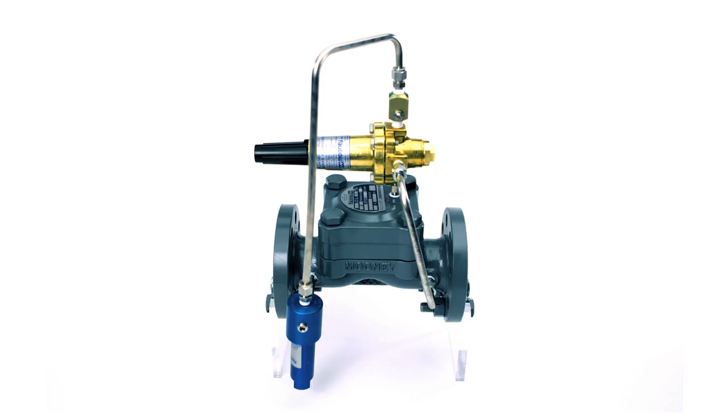Welcome to the Flowgrid Regulator product training video. In this video, you will gain an understanding of the Flowgrid Regulator and its recommended operation.

The Flowgrid Regulator is a valve used to control the pressure or flow of almost any gas or liquid. It is a self-contained pilot-operated device that can be used in pressure reducing, back pressure, and other applications.

The Flowgrid Regulator assembly consists of two main components, the valve body and the pilot assembly. The valve body controls the flow of gas from the upstream system to the downstream system. The pilot assembly is the controller or brain of the device. It measures the pressure in the downstream system. It also provides the proper loading pressure to proportionally control the flow of gas through the valve body.

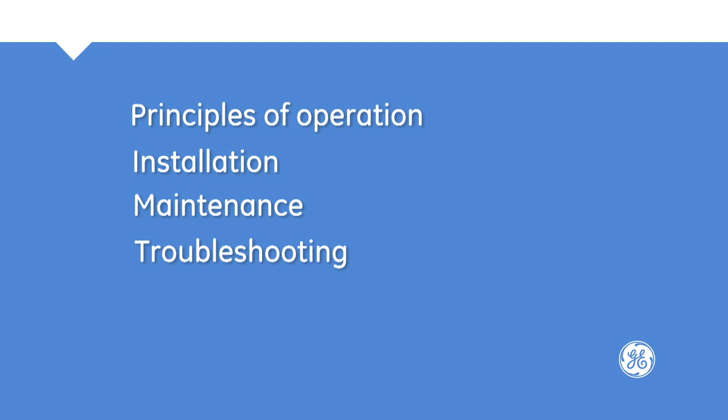In this video, we will focus on the basic principles of operation, installation, maintenance, and troubleshooting for the Flowgrid Regulator. Here are the Flowgrid principles of operation.

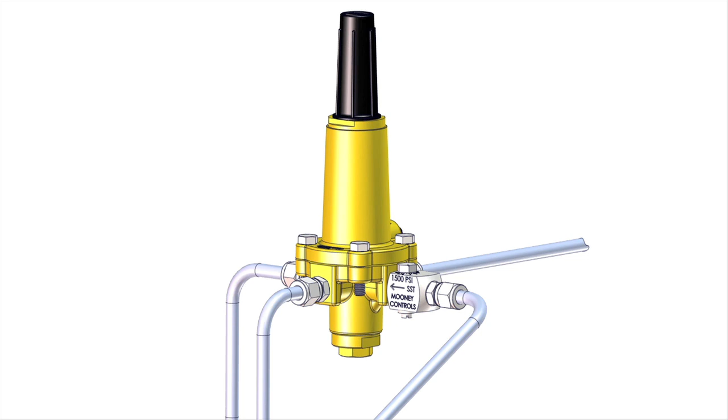The Flowgrid consists of a loading chamber, a diaphragm or throttling element, and the pilot assembly. The pilot assembly consists of the fixed orifice and a variable orifice. The pilot regulator is basically a self-operated regulator. The combination of the fixed and variable orifice comprises a pneumatic amplifier.

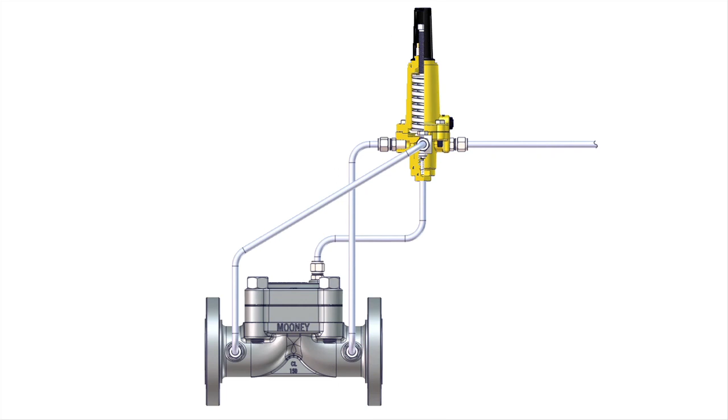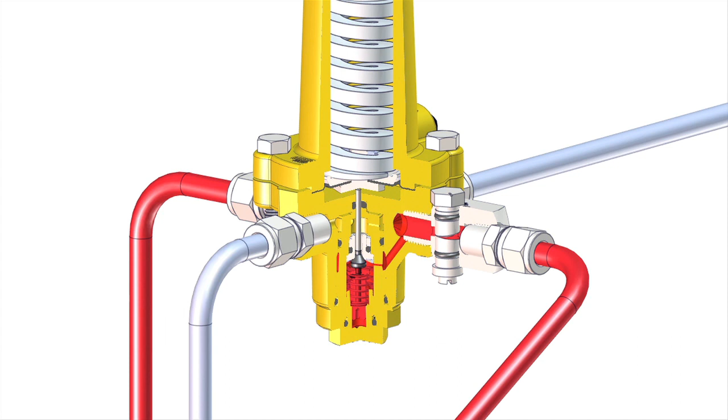The pilot controls the Flowgrid through three stages of control when configured for pressure reducing mode. 1. Fully closed. 2. Partially open. And 3. Fully open. The fully closed position occurs when there is no demand for gas in the downstream system. The pilot supplies full inlet pressure into the loading chamber of the regulator. When this happens, there is a zero differential on the inlet side, and therefore a zero force trying to lift the diaphragm up on the inlet side. There is, however, a full differential pushing the diaphragm down, closing the diaphragm on the downstream side.

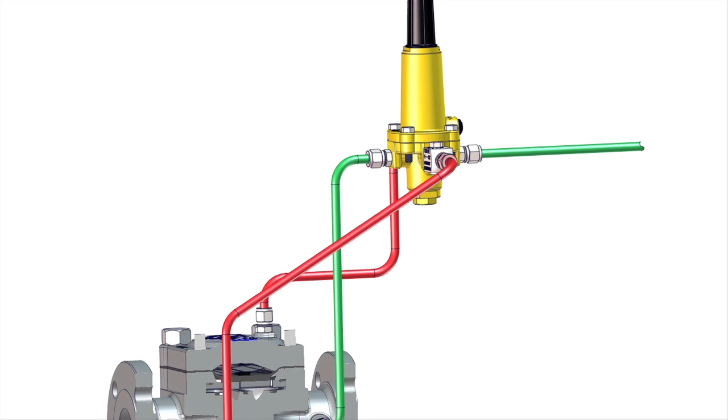The partially open position occurs when there is an increase in demand for gas in the downstream system. This increase in demand causes a decrease in pressure in the downstream system, which is sensed by the pilot. The spring in the pilot then partially opens the variable orifice. As the variable orifice opens, pressure from the loading chamber of the regulator escapes to the downstream system. The decrease in loading pressure allows some of the higher upstream pressure to flow through the regulator. This satisfies the demand and maintains the pressure of the downstream system.

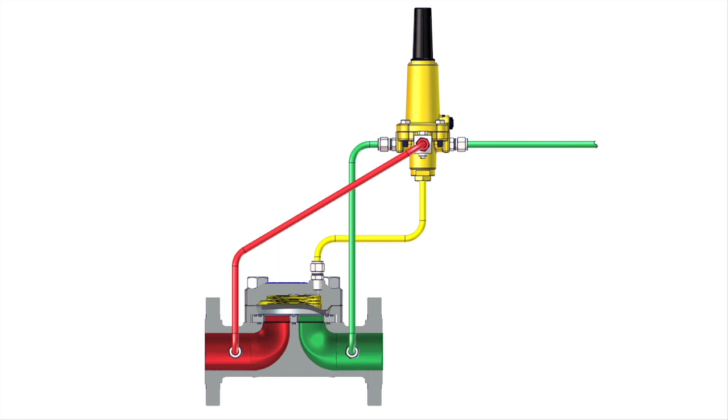The fully open position occurs when there is a large increase in demand for gas in the downstream system. In this situation, the pilot and regulator act much in the same manner as in the partially open position. The difference, however, is that the variable orifice will fully open, reducing the loading pressure to practically the same level as the downstream pressure. This allows for full differential between the inlet and loading chamber, allowing for maximum flow through the regulator.

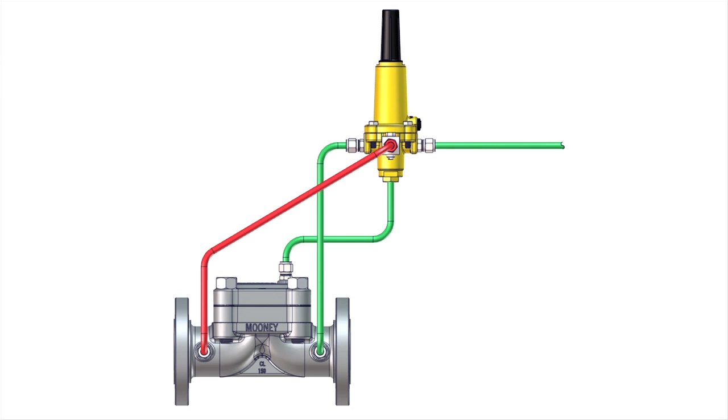The next most common use for the Flowgrid regulator is in the back pressure or relief mode. To convert the Flowgrid from pressure reducing to back pressure mode, simply change the pilot sense line from downstream to upstream and change the pilot's valve orientation. Details about configuring the pilot for use in back pressure mode will be provided in the Series 20 pilot training video.

In the back pressure mode, the Flowgrid remains completely closed until the set point of the pilot is reached. When this occurs, the pilot's variable orifice begins to open and releases some loading pressure to the downstream pipe. This decrease in loading pressure allows the diaphragm to partially open, therefore relieving some of the upstream pressure to the downstream pipe. Additional increase in inlet pressure may eventually cause the Flowgrid to go into a fully open position.

When the upstream pressure increases enough to fully open the pilot's variable orifice, the maximum amount of pressure will be discharged from the loading chamber. This causes the regulator's diaphragm to be fully opened and allows the maximum amount of gas to pass from the inlet to the outlet of the Flowgrid regulator. A decrease in inlet pressure will allow the Flowgrid to return to its partially open or fully closed position.

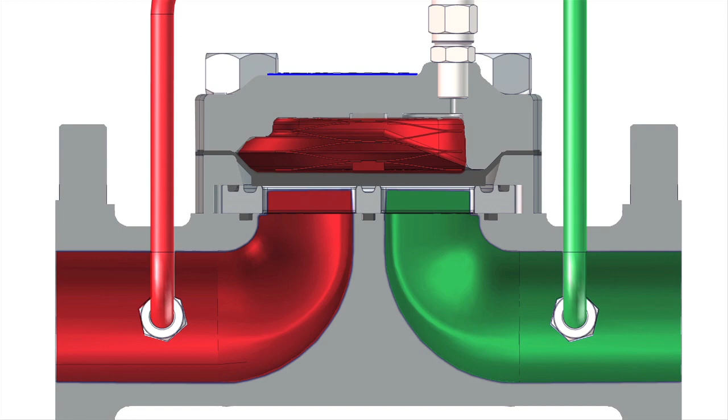Now that we've covered how the Flowgrid regulator works, we'll show you how to properly install it. First, make sure you received all the proper parts with the Flowgrid. You should find enclosed with the regulator a serial card with the serial number, a parts list for the regulator and pilot if equipped, and an installation, operation, and maintenance manual.

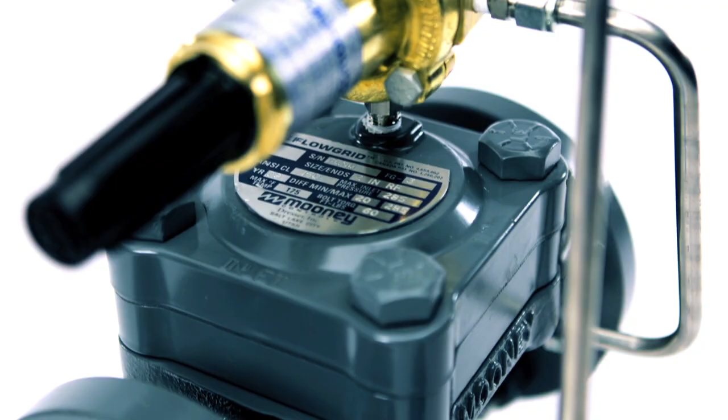Inspect your regulator for any signs of damage. This includes any tubing and pipe nipples that have been installed by the factory. Verify that the serial number and pressure rating on the nameplate are correct. Also verify that the ratings, which are stamped into the flanges, and the capacity, which is stamped into the spacer, are also correct.

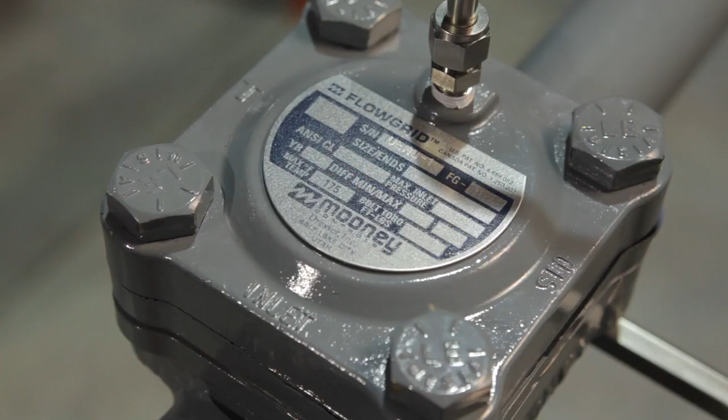Before installing the Flowgrid, please follow these general rules. Installation must be performed by qualified personnel and in a safe location. Verification of pressure rating and valve orientation is necessary. Verify the pressure rating by looking at the nameplate of the valve body.

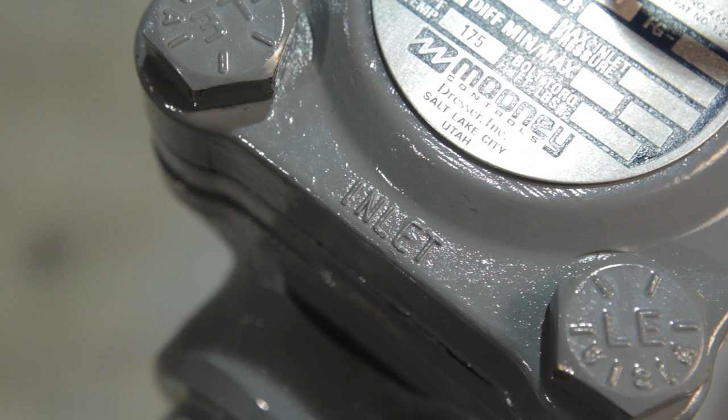The pilot has a separate nameplate that verifies the pressure rating of the pilot as well as the spring range. The flange rating is stamped into the edge of the flange itself. To verify the correct direction of flow for installation, please refer to the stampings on the top of the spring case that identify the inlet and/or outlet.

Locate the pilot sense line properly. The sense line should be installed 8 to 10 pipe diameters away from the regulator in an area of low velocity gas. It should be located away from any valves, reducers, or elbows that can cause turbulence in the pipeline.

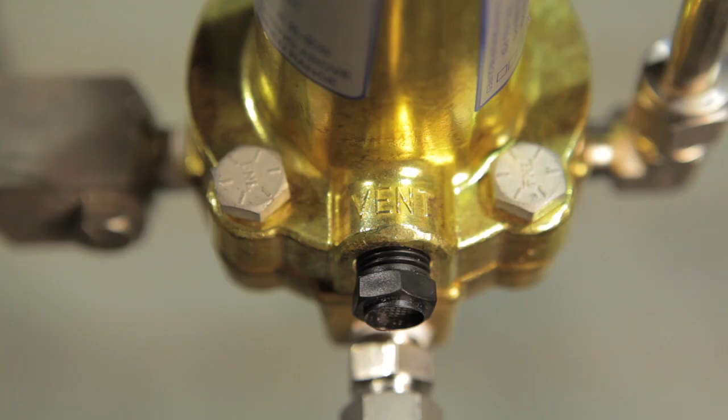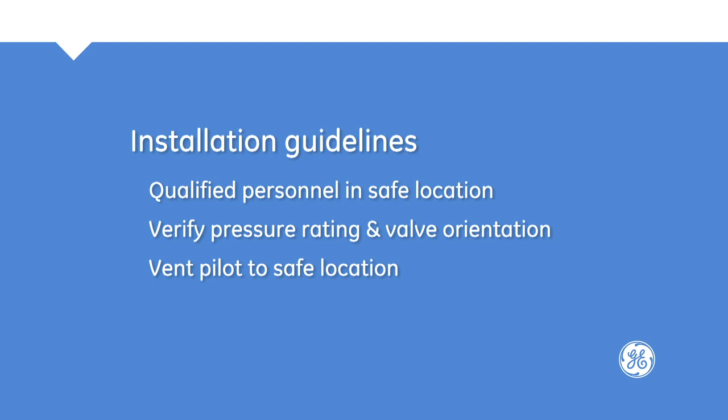The pilot vent connection is located on the spring case of the pilot. If the pilot is located above ground, we recommend the vent be pointed down to allow for condensation to drain. If the pilot is installed below ground or in a building, the pilot vent should be vented via tubing to a safe location. Ensure the lines are purged and all connections have been leak tested before proceeding with startup.

It is important to note that the Flowgrid regulator is rated for the same amount of pressure on the outlet side as it is on the inlet side. The pilot is rated for 1500 psi inlet and 1000 psi on the sense line connection. This means that there is little chance of damaging your Flowgrid upon startup or shutdown. The following procedure for startup, tuning, and adjustment can be used or modified for your application.

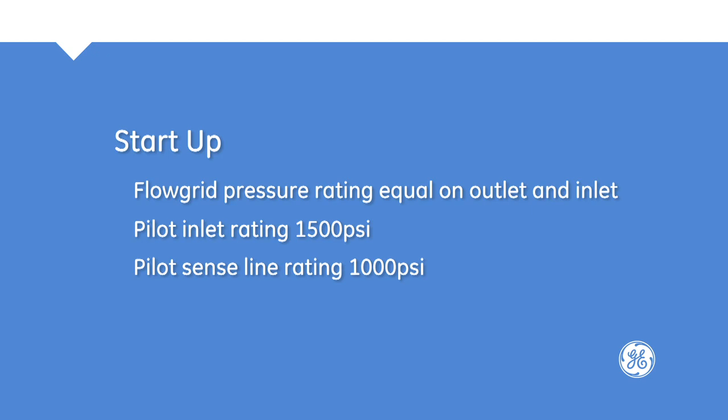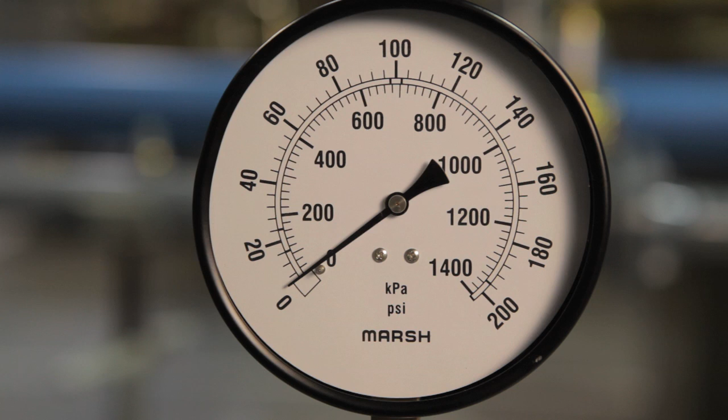Open a small vent valve downstream of the Flowgrid to establish some flow. Next, remove the closing cap from the pilot and back off the adjustment screw until you have a 0 setting on the regulator. Slowly open the inlet valve to allow pressure to enter the station. Turn the pilot adjusting screw in until you establish a small amount of flow through the downstream vent valve that was opened earlier. Continue to turn the pilot adjustment screw in until you reach the desired set point of the relief valve. Close the downstream vent valve.

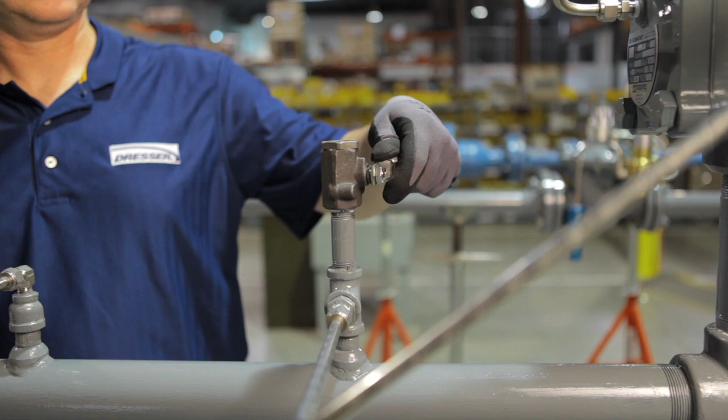Set the relief valve at this point. Reopen the downstream vent valve. Adjust the regulator down to the desired set point of the regulator. Adjust the gain of the regulator by adjusting the restrictor. If the outlet pressure from the regulator is unstable, adjust the restrictor setting. After adjusting the restrictor, readjust the pilot adjusting screw to achieve the exact outlet pressure you desire. Lock the pilot adjustment screw and replace the adjusting screw cap. Close the downstream vent valve. The regulator is now set for service.

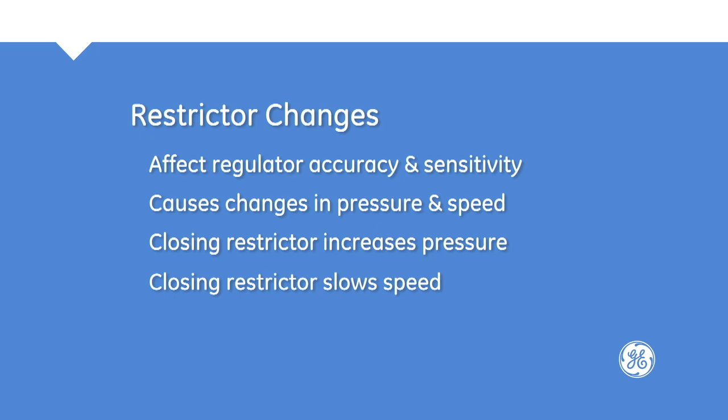Changes to the restrictor setting affect the accuracy and sensitivity of the regulator and will cause changes in pressure and speed of response. For example, closing the restrictor causes a slight increase in the outlet pressure, with the opposite effect when opening the restrictor. Also, the more closed the restrictor is, the slower the regulator will close, with the opposite effect when the restrictor is more open.

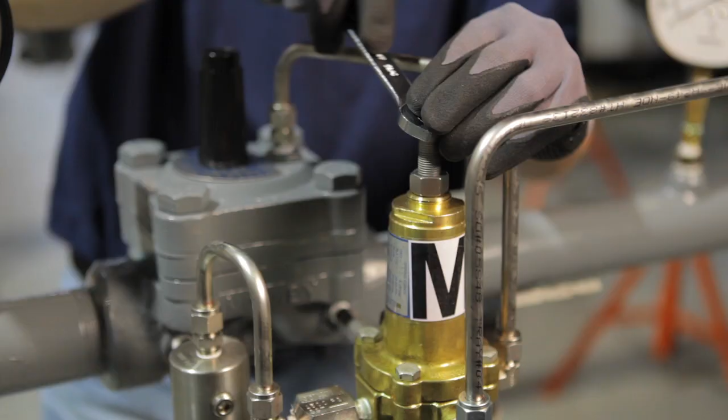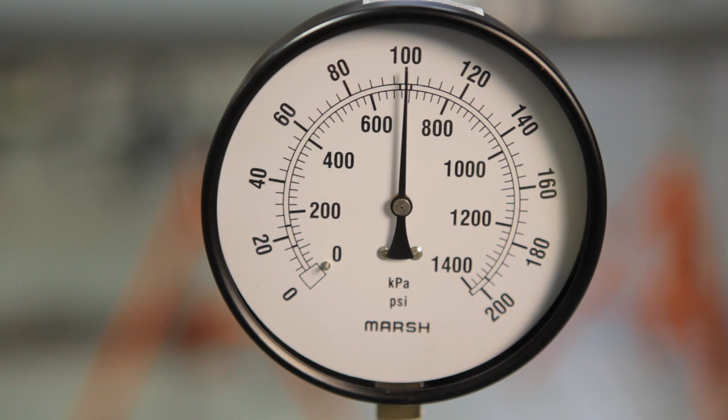Here is the standby monitor startup procedure. Start by setting the operating pilot at the maximum setting. Next, set the monitor pilot to the minimum or 0 setting. Slowly open the inlet block valve. If necessary, purge any pressure in the station. Full inlet pressure should be present at the monitor regulator, and the monitor regulator should be closed. Next, open the downstream block valve or vent.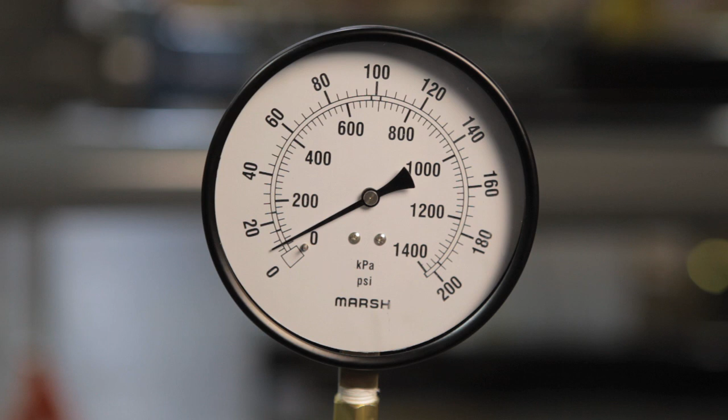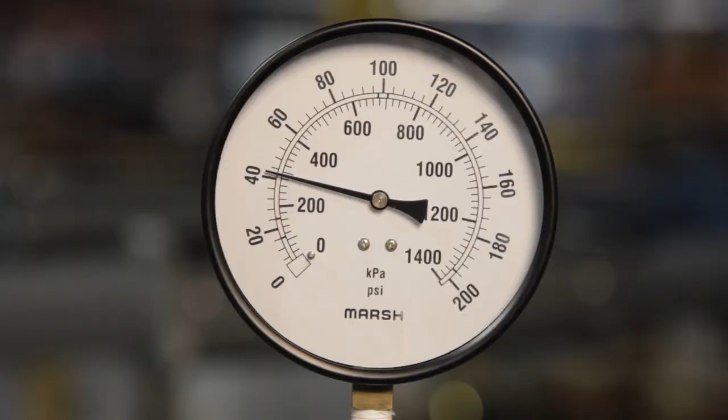Increase the pilot setting on the monitor regulator until the desired monitor override setting is reached. Lock the pilot setting. With some flow going through the station, start to lower the operating pilot setting of the operating regulator until outlet pressure is achieved.

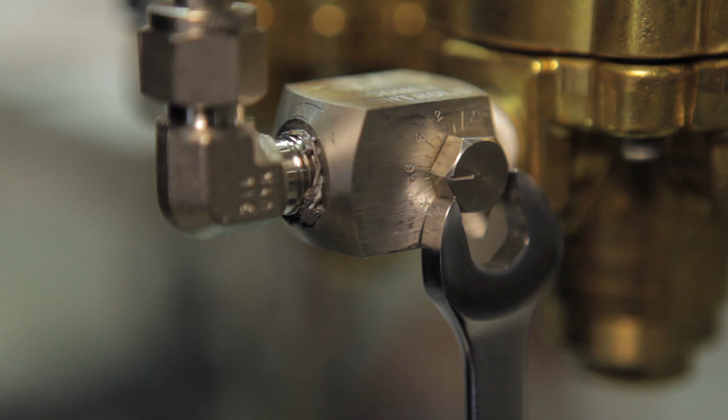Working monitor startup. Purge the station and open outlet valve or vent to allow for flow through the station. Set the pilot on the downstream regulator to a high setting above the desired set point. Next, set the pilot on the first regulator to a high setting above the set point. Then, adjust the monitor pilot to a 0 setting. Ensure that the restrictor on the first regulator's pilot is set at an intermediate setting of number 4.

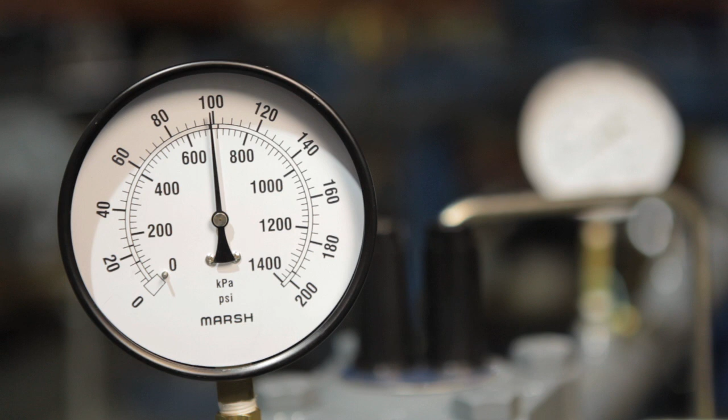Slowly open the inlet block valve to the station. The first stage regulator should remain closed as a result of the monitor pilot being set to 0. Increase the setting of the monitor pilot to the desired pressure setting. If the valve is unstable, increase the restrictor opening until it becomes stable. Lower the set point of the downstream regulator to the desired outlet pressure setting. Tune the restrictor on the downstream regulator at the same time.

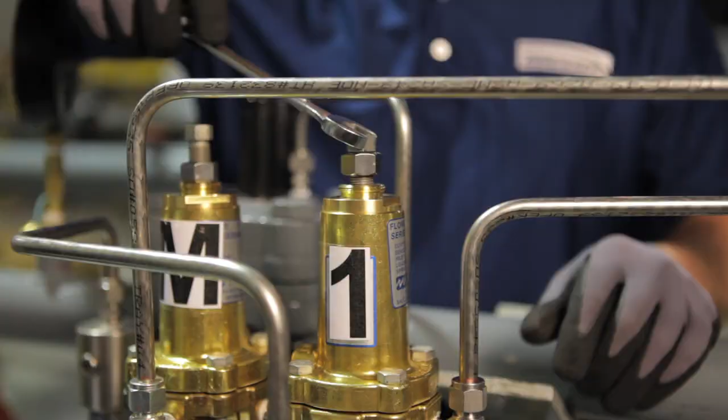The upstream regulator should open, or begin to control the interstage pressure at the set point of the upstream regulator's pilot. Adjust the set point of the upstream pilot to achieve the desired interstage pressure. Tune the restrictor on the upstream regulator's pilot at this time. Return the set point of the downstream regulator to the desired outlet pressure.

Once the Flowgrid regulator has been installed and is up and running, you'll need to perform proper maintenance. The first thing you should do is check the regulator station itself for any obvious mechanical damage. This includes the piping, the regulators themselves, any sensing or discharge piping, relief valves, etc. The next step is to go through a routine checklist just to ensure that the regulator is functioning properly.

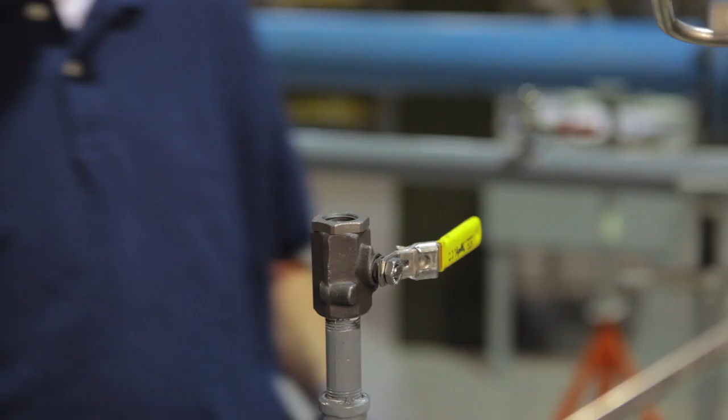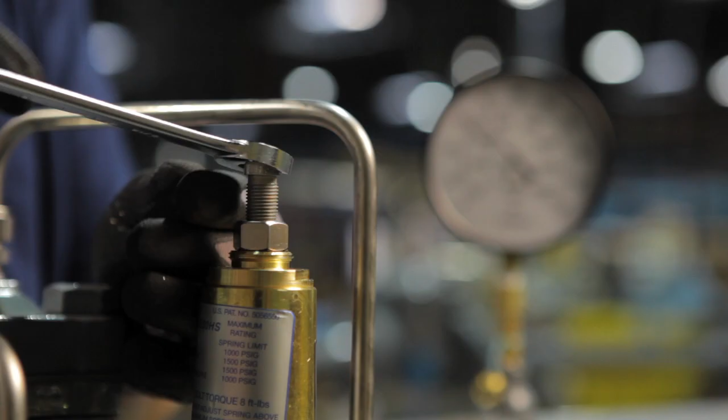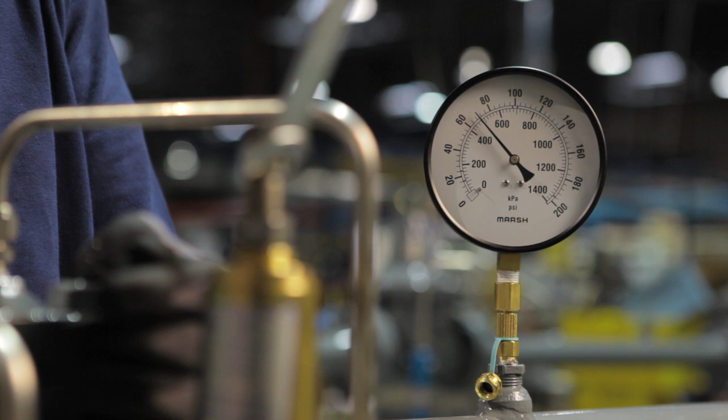It is necessary to establish flow through the regulator station while observing the outlet pressure gauge to ensure the regulator is controlling at the set pressure. The next step is to remove the closing cap from the pilot and adjust the set point of the regulator to ensure that the regulator responds to changes in the set point. Finally, you should vary the flow rate through the regulator from a high to low flow rate to observe the outlet pressure gauge. This ensures that the regulator is responding to increases and decreases in flow and controls at the

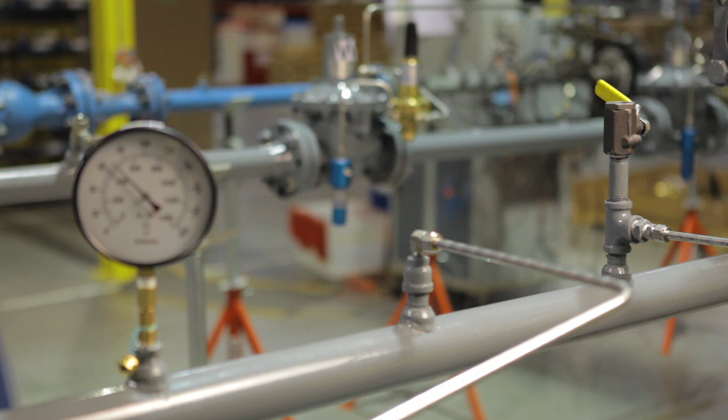set point. There are 2 procedures that you can use to determine that the regulator will shut off and lock up properly. The first procedure is to establish flow by opening an outlet valve or vent valve, checking to make sure that the regulator is controlling at the set point. Then, close the outlet or vent valve and observe the outlet pressure gauge to ensure that the pressure does not go above the lockup pressure of the pilot.

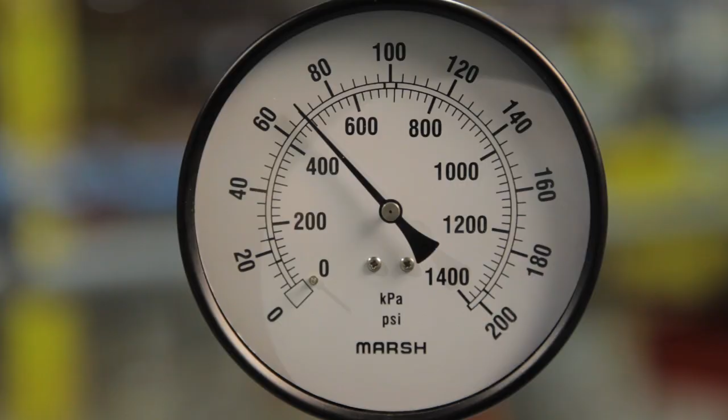You will have to wait an appropriate length of time to ensure that the pressure does not build up over the lockup pressure. If pressure builds up, then there is a leak. If the pressure remains stable, then the regulator has shut off and is locking up properly.

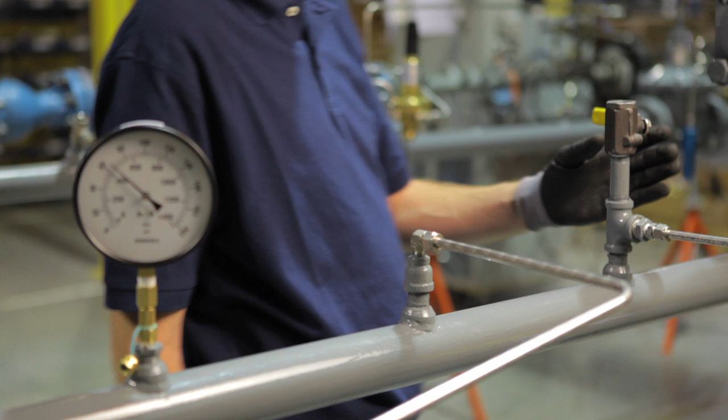The second procedure that you can use to verify lockup involves removing the closing cap from the pilot and backing off the adjustment screw until the spring force is fully relieved. This closes off the pilot and main valve. You can then open the downstream vent valve and blow off the pressure in the downstream system. Once the downstream system has completely vented, check for any leakage through the vent valve.

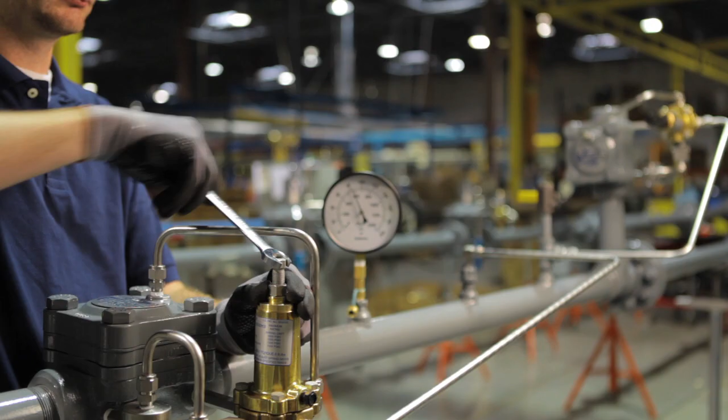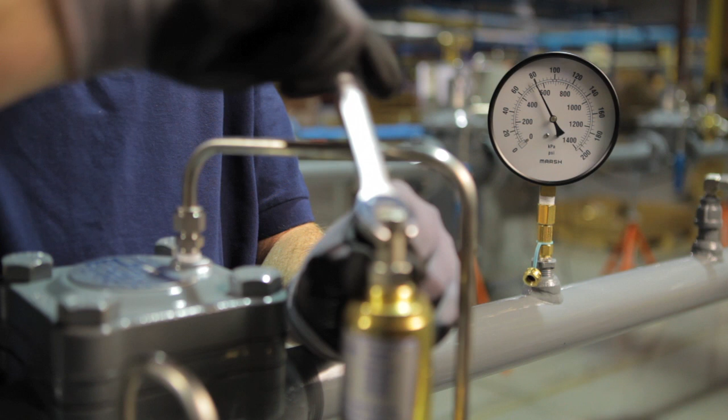Now we will discuss a method to determine that the relief valve operates and opens properly at the set point. First, you need to increase the pressure to the relief valve and listen for the relief valve to open. If the atmosphere is very noisy, you may use a bubble bottle to determine the exact opening point of the relief valve. An efficient way to increase the pressure is to go back to the upstream regulator and increase the set point of the pilot. Next, decrease the upstream regulator set pressure until the relief valve shuts off.

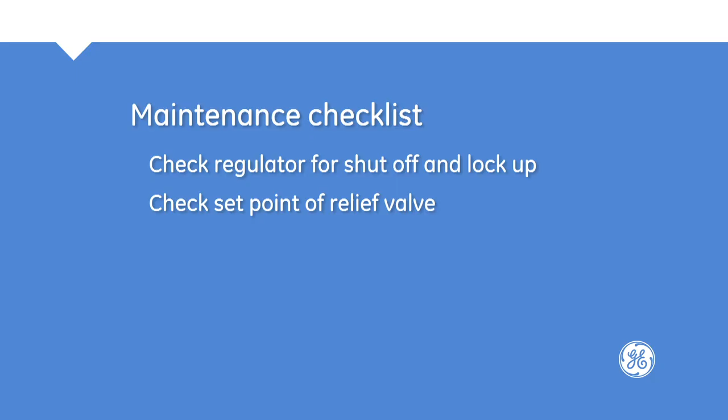Check for leaks. If any leaks exist, there are 2 potential leak paths, through the pilot or through the regulator body itself. Finally, remove the interconnect tubing between the pilot discharge and the regulator body and check for leaks. This enables you to determine whether the leak is from the pilot or the regulator. The final check involves checking all fittings for leaks. Use a commercially available leak detection product on all piping connections on regulators and relief valves to ensure that there are no

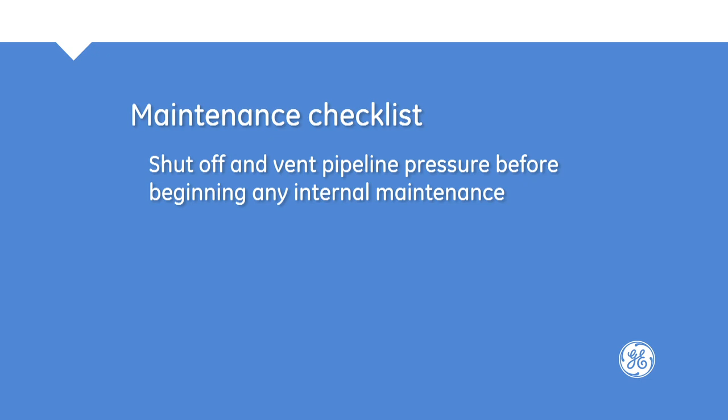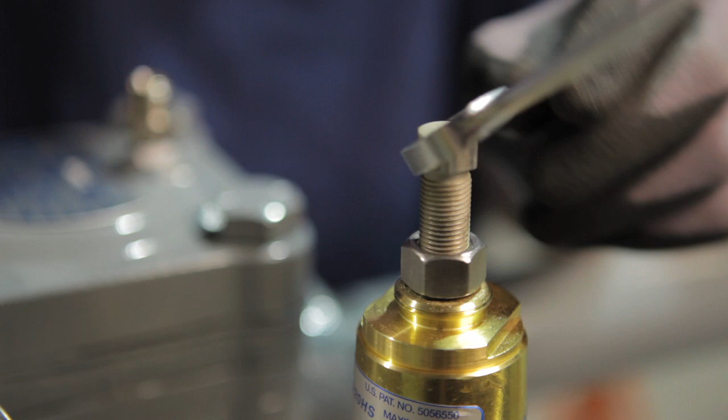external leaks. Now that we've gone as far as we can with external inspections, let's move on to disassembly and internal inspection. Remember to make certain that the pipeline pressure has been shut off and vented before beginning any internal maintenance work. Disassembly and maintenance of the pilot will be covered in the Series 20 pilot training video. To start the disassembly process, depending on your configuration, remove sensing line tubing, pilot supply tubing, and discharge line tubing. Remove the pilot closing cap and back the adjustment screw out to remove tension from the pilot main spring.

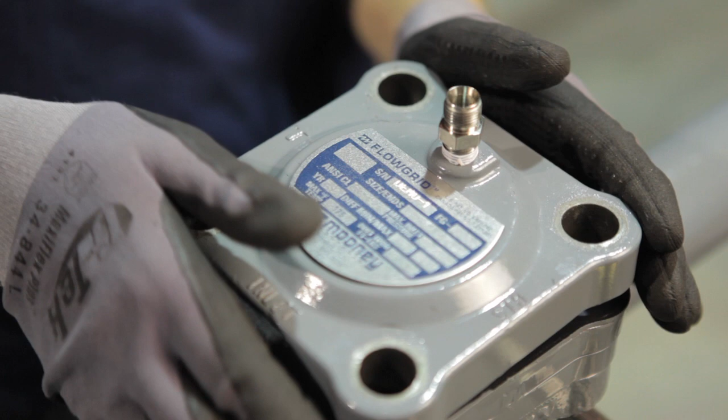Remove the bolts holding the spring case to the regulator body. Remove the spring case. Remove the main spring. Remove the diaphragm. Remove the spacer. Remove the throttle plate. Remove the body seal. Inspect the body for dirt or debris.

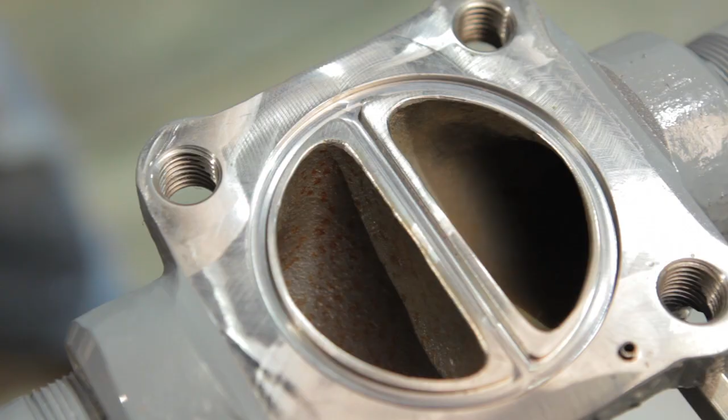Use a cloth and solvent that's compatible with nitrile-based rubber and wipe off the body, paying special attention to the O-ring groove. Rust can be removed with emery paper, after which use the rag and solvent again to clean any residue. After cleaning, you can begin to reassemble the regulator. Start by inspecting the body seal. Ensure that it is clean and is free from cracks or deterioration. If there are any signs of deterioration, replace the body seal.

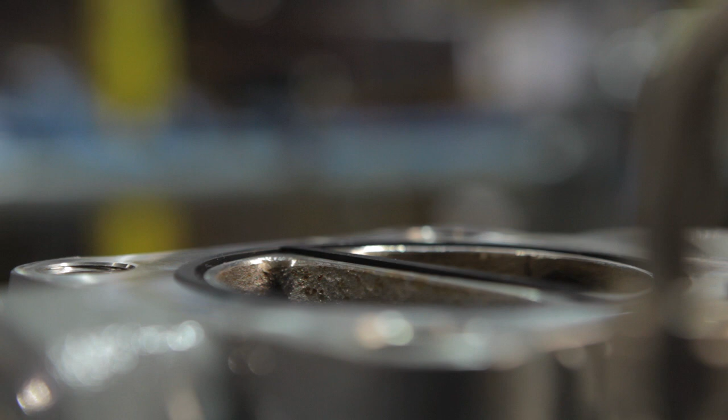Next, insert the body seal into the regulator body. Ensure that the seal protrudes above the surface of the body. It should protrude from the body by roughly 20 thousandths of an inch. This provides for a proper seal of the mating component. Next, clean the throttle plate.

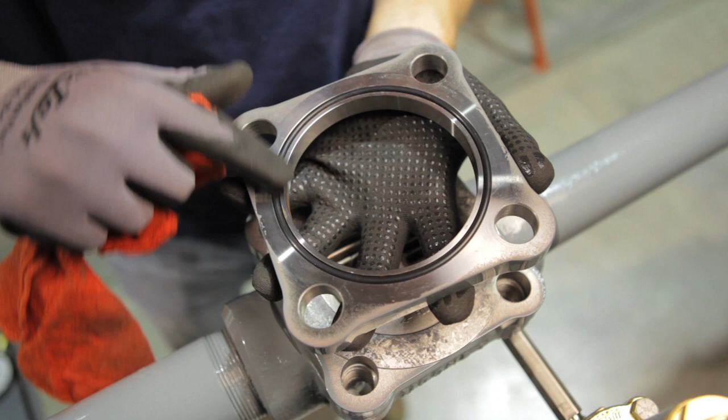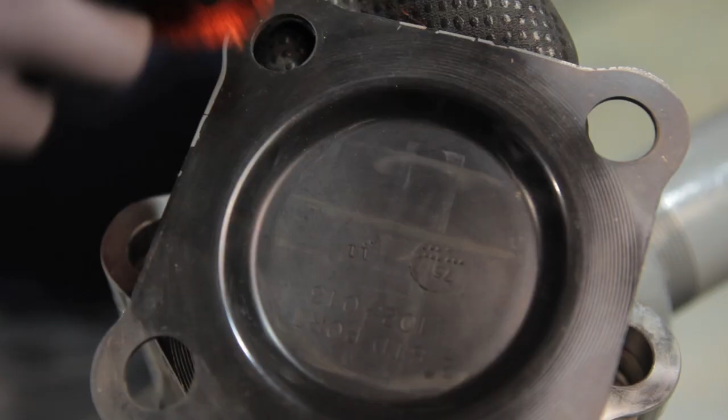Reinstall the throttle plate. The next step is to inspect the diaphragm and spacer. Make sure that the diaphragm is clean and free from any defects or deterioration that might prevent proper sealing. If there are any visible defects, replace the diaphragm. A used diaphragm may have the grid pattern imprinted in the rubber.

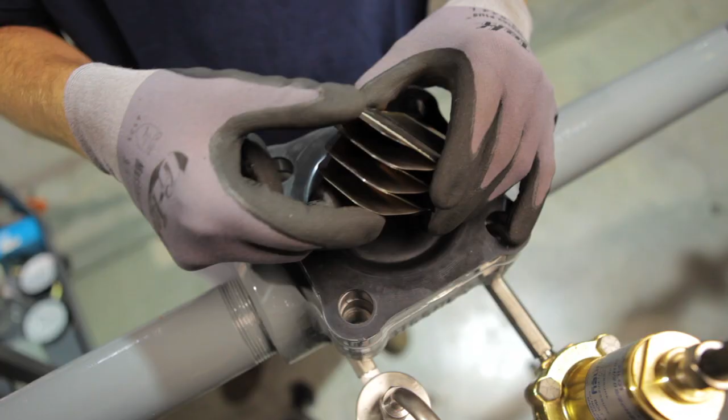You may wish to rotate the diaphragm 180 degrees upon reassembly, so the smooth side of the used diaphragm is now in the downstream side. Following the diaphragm installation, you will want to inspect the spring. Ensure that there is no damage or cracks, paying special attention to the spot welds. The next step is to replace the spring case.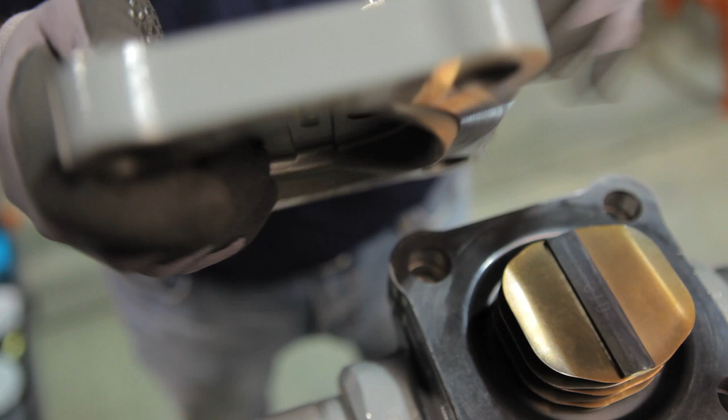Note that the 1-inch, 2-inch, and 3-inch spring cases have a diaphragm guide built into the outlet side. Ensure that the diaphragm guide is installed on the downstream side of the regulator. Replace the bolts and torque to the value that is noted on the nameplate using a crisscross pattern.

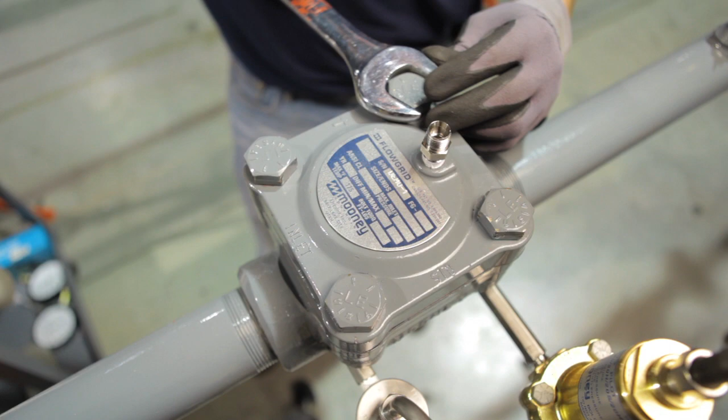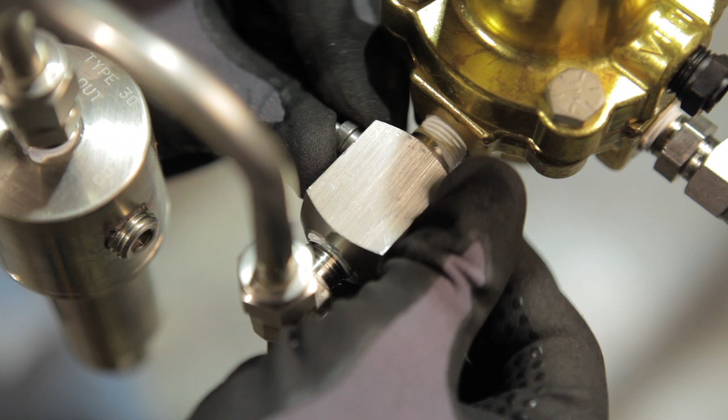The next item to inspect and clean is the restrictor. Loosen the bottom cap on the restrictor and push the rotor and O-ring out of the restrictor body with a punch or similar tool. Clean both the rotor and the body. Inspect the rotor O-rings and replace if necessary. Lubricate the O-rings if necessary before reinstalling the rotor back into the restrictor body.

Tighten the rotor assembly. Sense line tubing, pilot supply tubing, and discharge line tubing can all be reconnected at this point. The regulator can now be pressurized. Check for leaks and readjust the pilot setting as necessary. The regulator can now be brought back into service.

We'll now cover troubleshooting tips for some field issues that you might encounter. The first steps in troubleshooting your Flowgrid regulator should be: verify that the regulator specifications fit the application conditions. The minimum and maximum inlet pressure, control pressure range, and minimum and maximum operating differentials should be checked to make sure the valve and pilot are designed to operate in the present conditions.

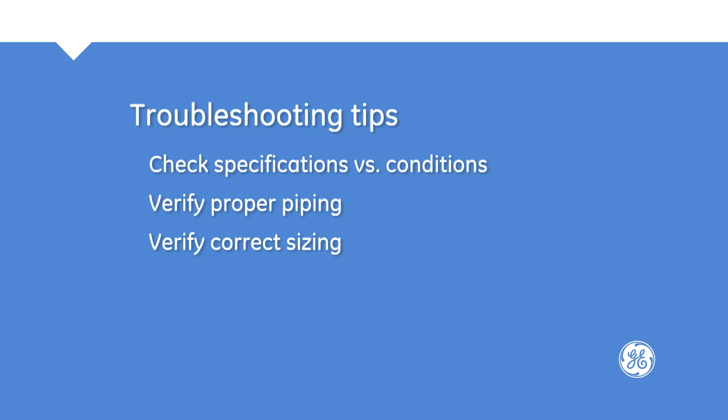Verify the regulator is piped properly. Check that current piping connections match the recommendations shown in the installation, operation, and maintenance manual. Verify the regulator is sized correctly. Regulators operating below 10% or above 80% of their maximum capacity, given current application conditions, tend to have more problems. Consider reduced capacity trim or a larger regulator in these cases.

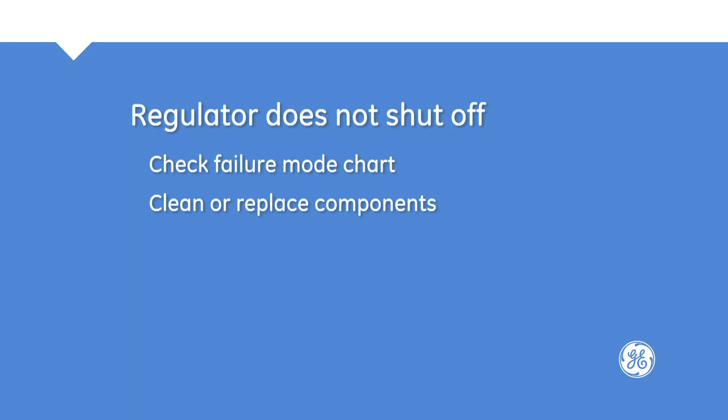Another problematic field issue is the regulator does not shut off. In this case, refer to the failure mode chart to diagnose potential causes. Clean or replace valve and pilot components as necessary. Erratic control. If you are experiencing erratic control of your Flowgrid, then you should check for the following. Check for damage or debris in the restrictor and control pilot. Replace, clean, and lubricate components as necessary.

Consider pilot supply filtration with a Mooney Type 30 filter. Check for the potential of hydrate formation or freezing liquids in the pilot system. If liquids are present, consider gas conditioning before the pilot and/or valve, heating the supply gas to the regulator, or heating the pilot supply gas using a pilot gas heater.

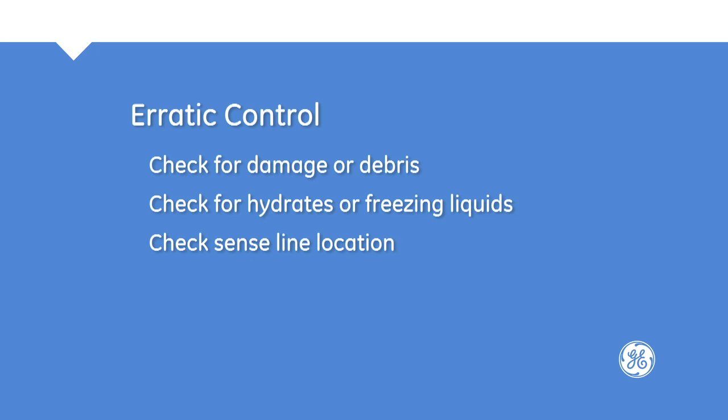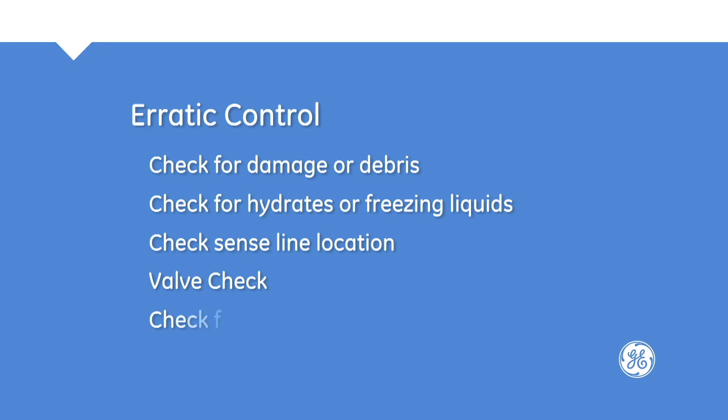Check the sense line location and be sure it is away from turbulent locations. Moving the sense line to a new location often solves control problems. Check to make sure needle valves are not used on any pilot system connections. Full opening type valves are recommended. Check for pilot vent port blockage.

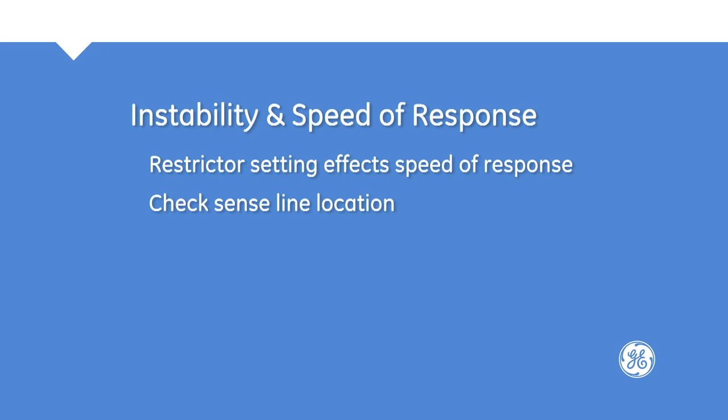If you are having instability and speed of response issues with your Flowgrid, then you should check for the following. Change the restrictor setting. Refer to the startup and operation portion of the IOM manual. Check the sense line location and be sure it is away from turbulent locations. Moving the sense line to a new location often solves control problems. Check that needle valves are not used on any pilot system connections. Full opening type valves are recommended. Check for pilot vent port blockage.

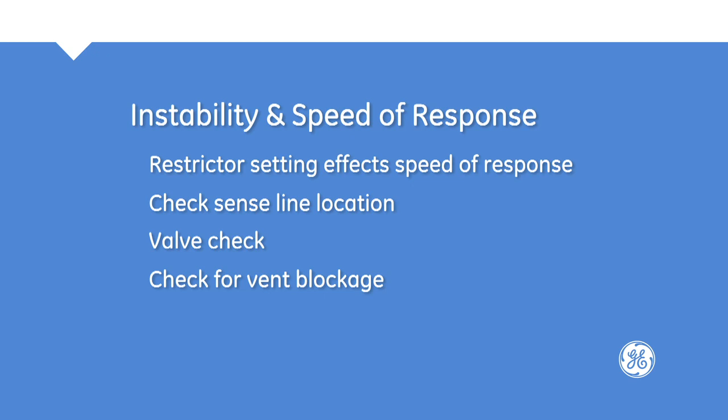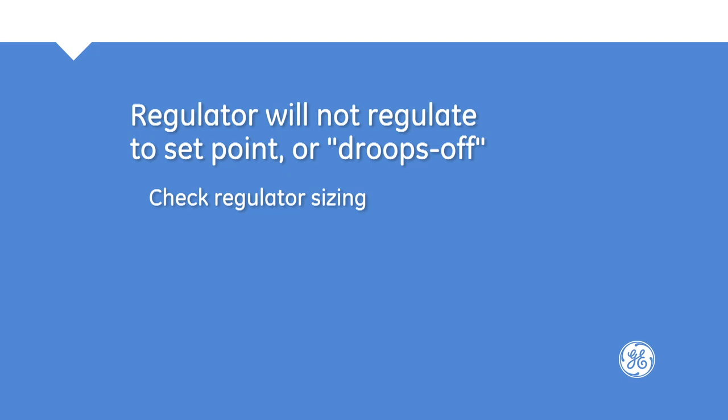If your regulator will not regulate to the set point, then you should check for the following. Check for proper sizing. The regulator may be running out of capacity during peak demand periods. Adjust the restrictor to a higher gain or a smaller setting. Refer to the startup and operation portion of the IOM manual.

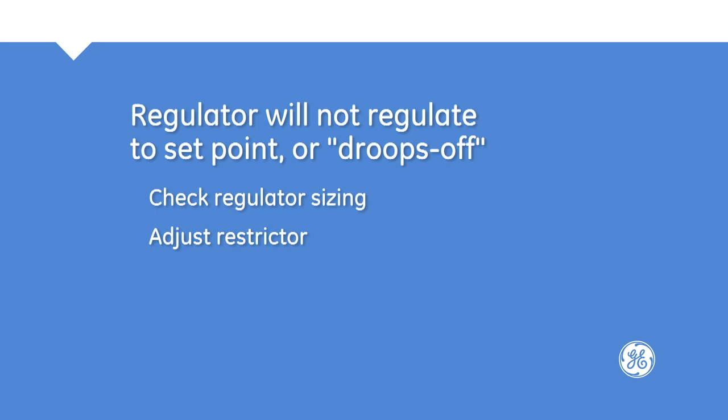This concludes the basic principles of operation, installation, maintenance, and troubleshooting training video for the Mooney Flowgrid Regulator.